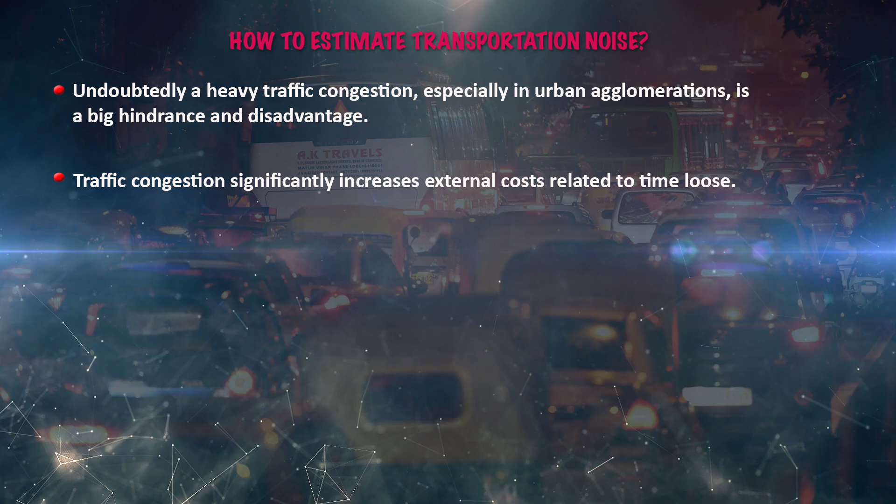So with this previous knowledge, dear learner, today we are going to discuss estimation of transportation noise. How to estimate transportation noise? Undoubtedly heavy traffic congestion, especially in urban cities, is a big hindrance and also a disadvantage. Traffic congestion significantly increases external costs related to time loss. It has a negative impact on health also. Due to the increased travel time, the stress increases and also the arterial pressure increases. So the driver's ability to respond properly definitely decreases, and in consequence there is a safety issue. So these are the factors involved in the transportation sector.

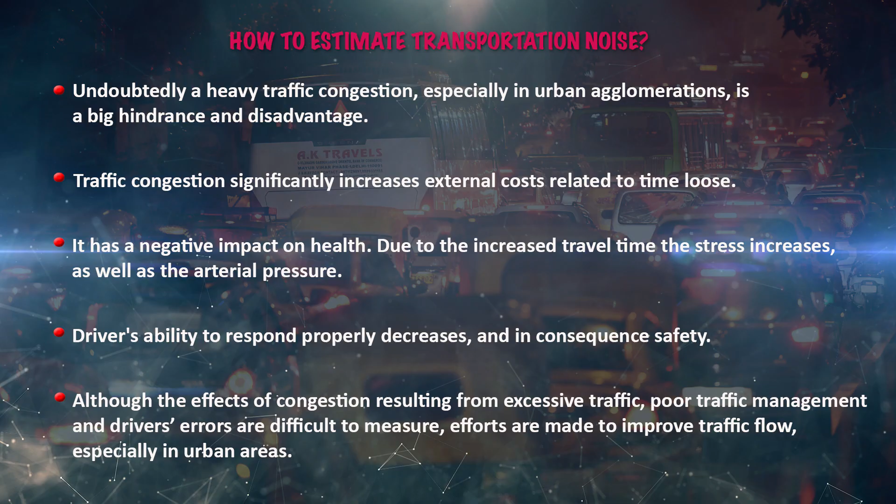So although these effects of congestion resulting from excessive traffic, poor traffic management and sometimes drivers' errors are difficult to measure, many efforts are made to improve traffic flow, especially in urban areas. Congestion is a result of improper traffic management and objective overcapacity. It is also a strong determinant of pollution dispersion and also air pollution levels we have experienced.

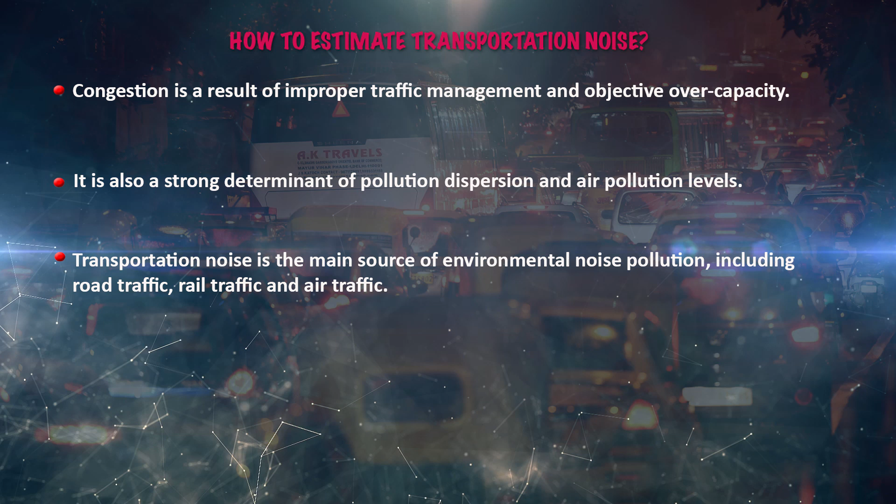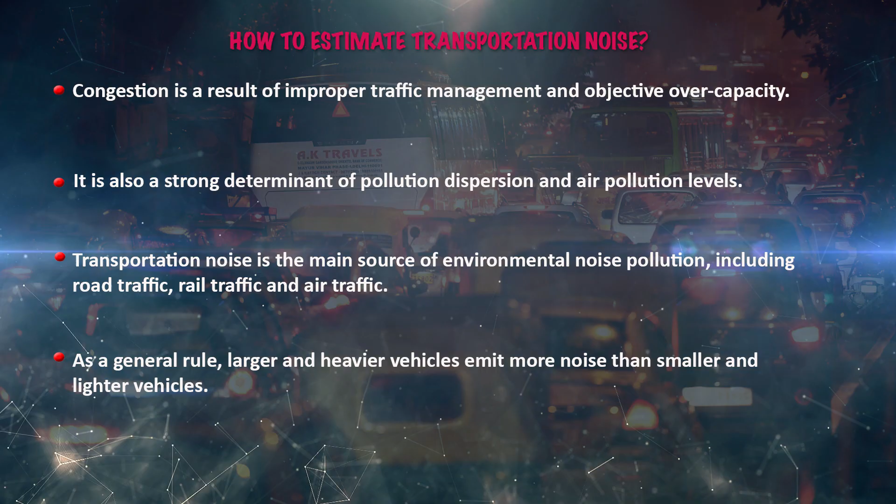So transportation noise is the main source of environmental noise pollution, like road traffic, railway traffic and also air traffic. There is a general rule that larger and heavier vehicles emit more noise than smaller and lighter vehicles. Some exceptions are there, that means helicopters and 2 and 3 wheelers. The noise of road vehicles is mainly generated from the engine and also from frictional contact between the vehicle and the ground and air. So these are some of the elements which can propagate.

And in general, road contact noise exceeds engine noise at speeds higher than 60 km/h. The physical principle responsible for generating noise from the tire road contact is less well understood, that means it is not properly studied. So the sound pressure level from traffic can be predicted from the traffic flow rate, the speed of the vehicles, the proportion of heavy vehicles and the nature of the road surface.

Special problems definitely will arise in areas where the traffic movements involve a change in engine speed and power, like traffic lights, hills and also some intersecting roads. Sometimes it may be topography, meteorological conditions and low background levels which are unfavorable, like mountain areas.

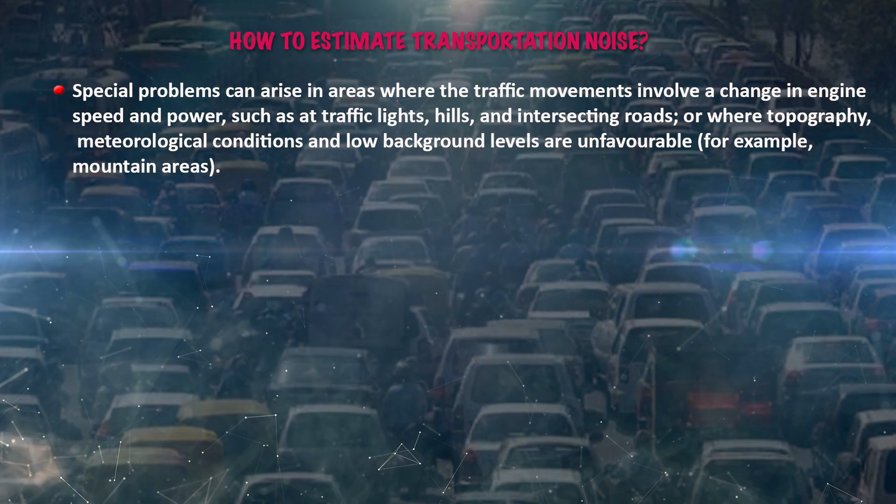And railway noise depends primarily on the speed of the train, but variations are present depending upon the type of engine, type of wagons, the rails and their foundations and also the roughness of wheels and rails. It is very interesting to know that small radius curves in the track, as may occur for urban trains, can lead to very high levels of high frequency sound, known as wheel squeal. Noise can be generated in stations because of running engines, whistles and loudspeakers, and in marshalling yards because of shunting operations.

So the introduction of high speed trains has created special noise problems with sudden but not impulsive rises in noise. At speeds greater than 250 kilometers per hour, the proportion of high frequency sound energy increases and the sound can be perceived as similar to that of overflying jet aircraft. Special problems can arise in areas close to tunnels, in valleys or in areas where the ground conditions help to generate vibrations. The long distance propagation of noise from high speed trains will constitute a problem in the future if environmentally friendly railway systems are expanded.

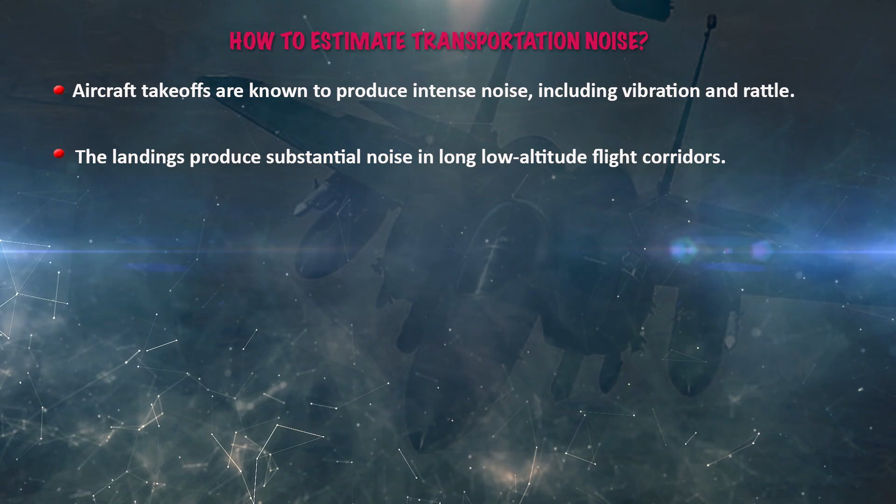Aircraft operations generate substantial noise in the vicinity of both commercial and military airports. Aircraft takeoffs are known to produce intense noise, vibration as well as rattle sound sometimes. The landing procedures also produce substantial noise in long, low altitude flight corridors.

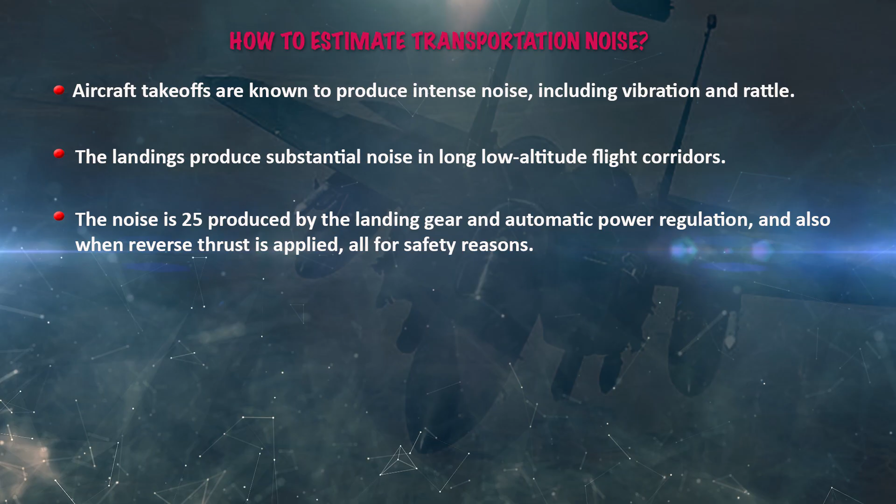So the noise is produced by the landing gear and also automatic power regulation and also when reverse thrust is applied, all for safety reasons only. But in general, larger and heavier aircraft produce more noise than lighter aircraft.

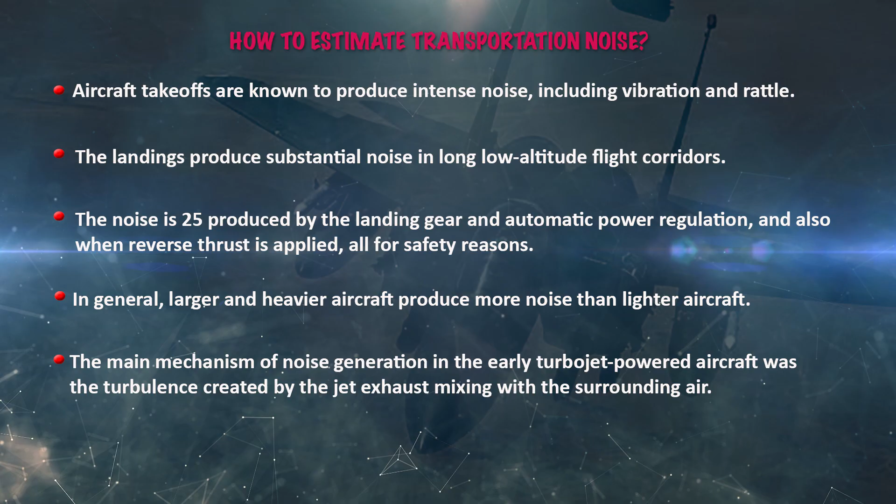So the main mechanism of noise generation in the early turbojet powered aircraft was the turbulence created by the jet exhaust mixing with the surrounding air. This noise source has been significantly reduced in modern high bypass ratio turbofan engines that surround the high velocity jet exhaust with lower velocity airflow generated by the fan.

So the fan itself can be a significant noise source, particularly during landing and taxiing operations. Multi-bladed turboprop engines can produce relatively high levels of tonal noise. The sound pressure level from aircraft is typically predicted from the number of aircraft, the type of airplanes, their flight paths, the proportions of takeoffs and landings, and the atmospheric conditions.

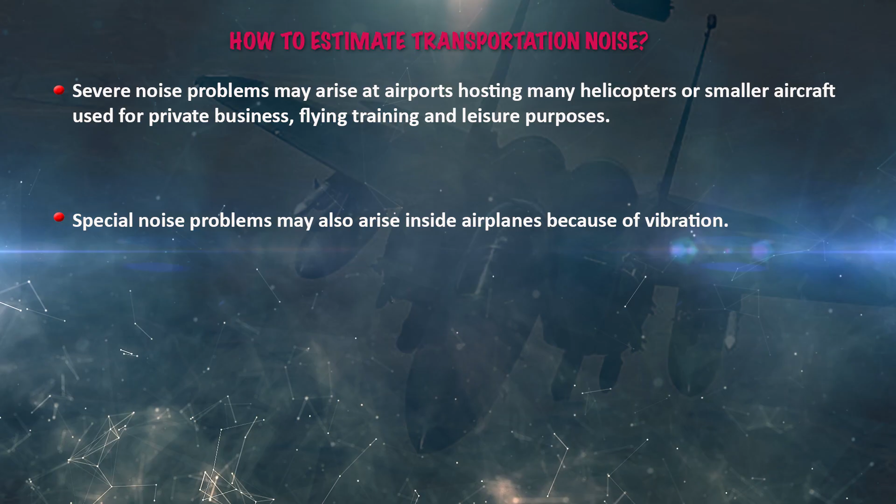Severe noise problems may also arise at airports hosting many helicopters or smaller aircraft used for private business, flying training and sometimes leisure purposes. Special noise problems may also arise inside airplanes because of vibration. The noise emission from future superjets is of course unknown.

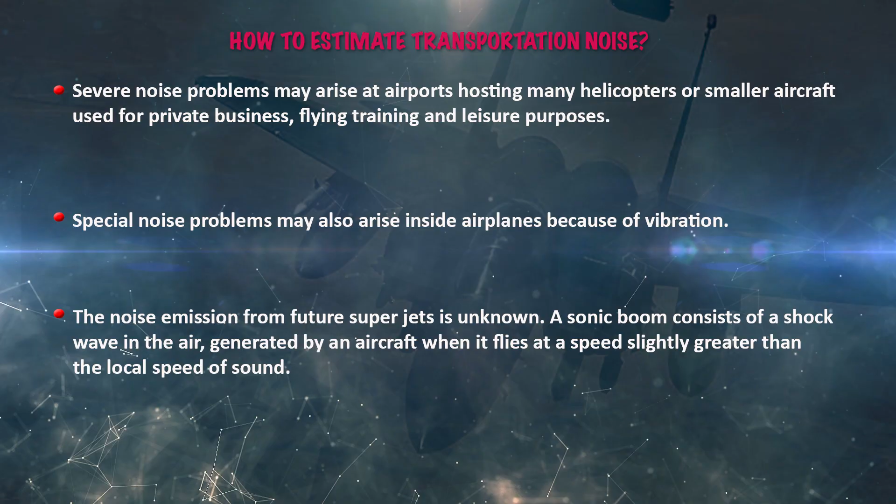A sonic boom consists of a shock wave in the air generated by an aircraft when it flies at a speed slightly greater than the local speed of sound. An aircraft in supersonic flight trails a sonic boom that can be heard up to 50 kilometers on either side of the ground track, depending upon the flight altitude and the size of the aircraft. A sonic boom can be heard as a loud double boom sound. At high intensity it can damage property.

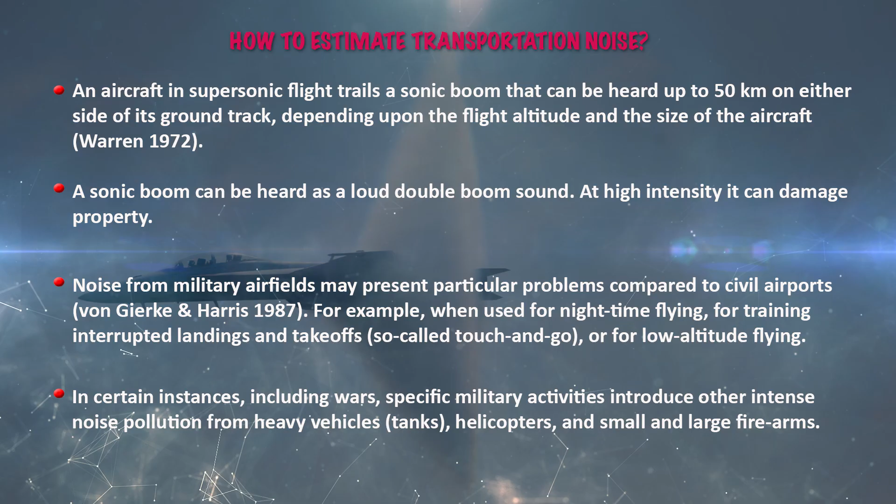Noise from military airfields may present particular problems compared to civil airports, for example when used for nighttime flying, for training interrupted landings and takeoffs, that means touch and go, or for low altitude flying. In certain instances, like wars or specific military activities, there is other intense noise pollution from heavy vehicles like tanks, helicopters, and small and large firearms.

So there are 5 types of transportation noise estimation. The first one is internal combustion engine noise prediction. When the internal combustion engine is working, it generates a lot of noise in the surrounding environment. Noise can disturb people's daily life and even endanger people's health, so it has become a growing concern of society. Long exposure to noise can cause insomnia, cardiovascular diseases, and sometimes death.

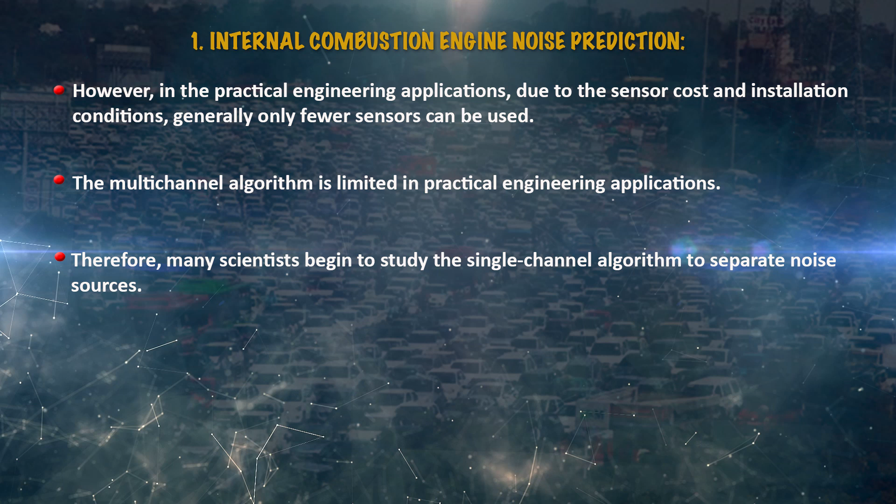The Global Legislative Committee is developing strict regulations to make ships, cars, and other transportation vehicles quieter. However, in practical engineering applications, due to sensor cost and installation conditions, generally only fewer sensors can be used, so the multi-channel algorithm is limited. So many scientists began to study single channel algorithms to separate noise sources.

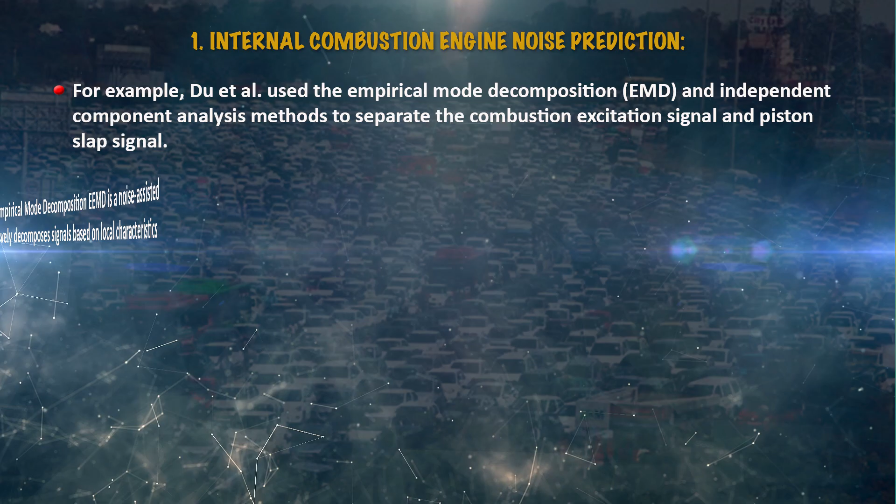For example, Du et al. used empirical mode decomposition, EMD, and independent component analysis methods to separate the combustion excitation signal and the piston slap signal. Another is ensemble empirical mode decomposition, EEMD, a noise assisted data analysis method that adaptively decomposes signals based on their local characteristics.

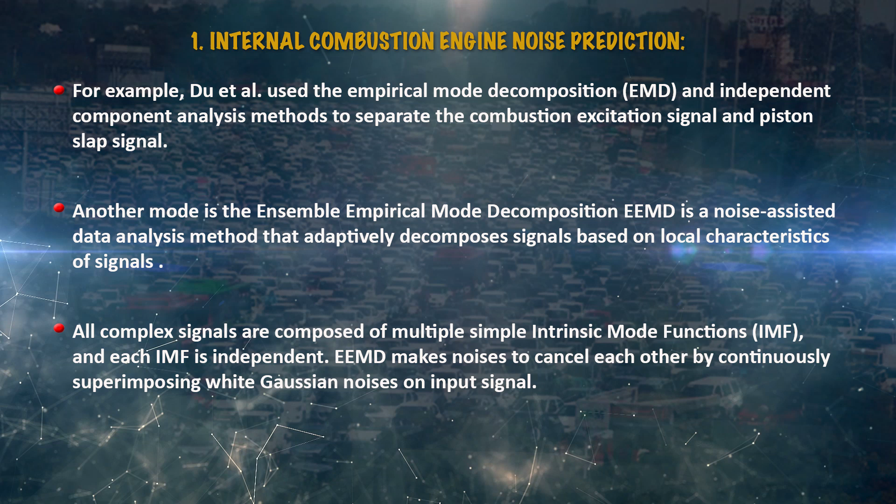All complex signals are composed of multiple intrinsic mode functions, IMFs, and each IMF is independent. EEMD makes noise cancel out by continuously superimposing white Gaussian noise on the input signal. In this way, it can decompose different scales or trend components that really exist in the data time series step by step, generating data sequences with the same characteristic scale, and the added noise is gradually eliminated, so the final denoised result is the signal itself, the only durable and stable part of the EEMD.

The next one is the robust ICA method to separate the combustion noise, piston slap noise and exhaust noise of gasoline engines. Others utilize EEMD, coherent power spectrum analysis and an improved analytic hierarchy process method to identify the noise sources of internal combustion engines. In some cases, EEMD and generalized transform methods are employed to separate combustion noise, piston slap noise as well as gear noise.

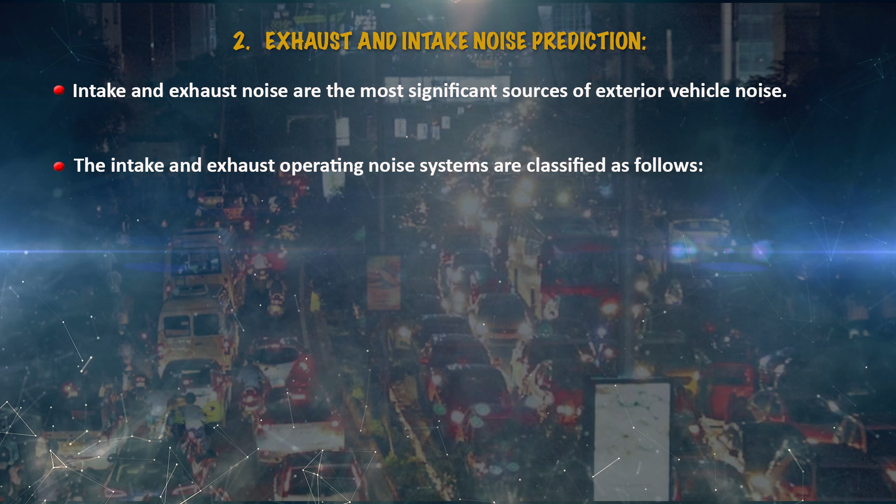The second method is exhaust and intake noise prediction. Intake and exhaust noises are the most significant sources of exterior vehicle noise. They are divided into primary noise sources: pressure fluctuations in the manifolds and their propagation to the exhaust tailpipe or intake orifice, radiated as noise, caused by the unsteady mass flow through the valves.

The system responsible for engine breathing, or primary noise, is suitably harnessed to improve the volumetric efficiency of the engine by wave action tuning. The secondary noise sources are the flow motion through the intake and exhaust systems. This self-induced noise is normally called flow noise.

So the structure radiated sound, that means shell noise from the intake or exhaust tailpipes, which are energized by either primary or secondary noise sources. And aerodynamic noise, that consists of both the classes, that is breathing and the flow noise. And also some other portion is tire, or otherwise we can say road noise prediction.

So the recognition of road noise is considered as one of the major environmental pollutions we have learned. But consequently, it leads to the advancement in accurate noise prediction models that enable us to predict the traffic noise and that recognize common variables like traffic flow, sometimes vehicles per hour, and also traffic speed, and also the composition in terms of fraction of heavy vehicles and road gradient, and also traffic.

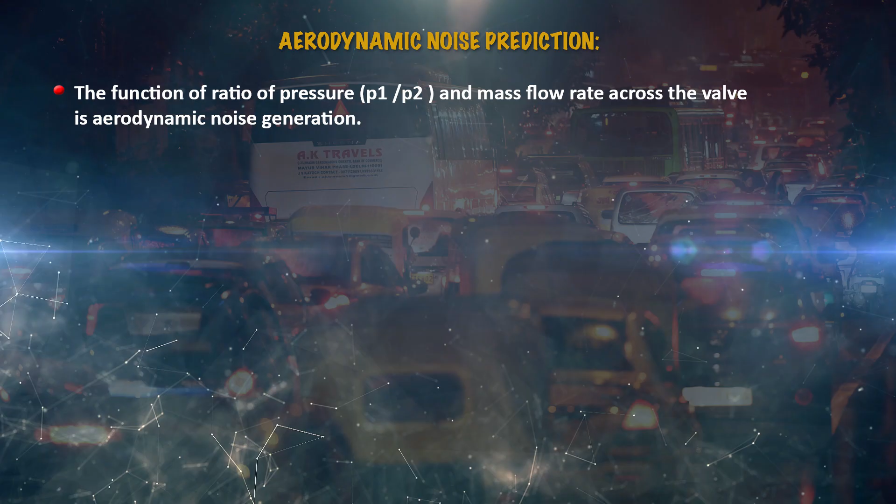And then aerodynamic noise prediction, that means the function of ratio of pressure, P1 upon P2, and also mass flow rate across the valve is the aerodynamic noise generation. So the point at which sonic speed is reached in the valve vena contracta is a function of the valve design and its pressure recovery coefficient, and this is combined with the ratio of upstream to downstream absolute pressure.

So these valves are said to be choked when sonic velocity reaches the vena contracta. By keeping upstream pressure constant, if the ratio of pressure increases, there is no increase in their capacity. Subsonic flows also produce high noise levels, but usually the highest noise level sources are choked valves. So considerable noise starting at pipe velocities of approximately 0.4 to 1.0 sonic is generated by the velocity of the flow in downstream pipes.

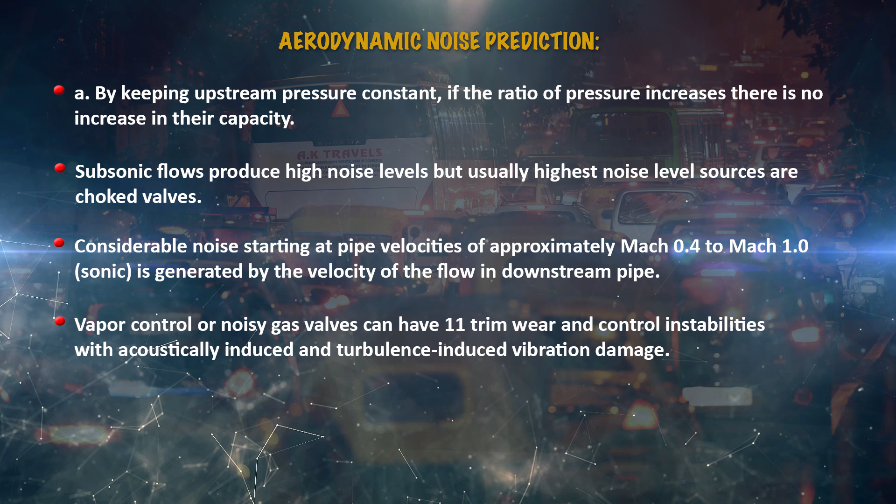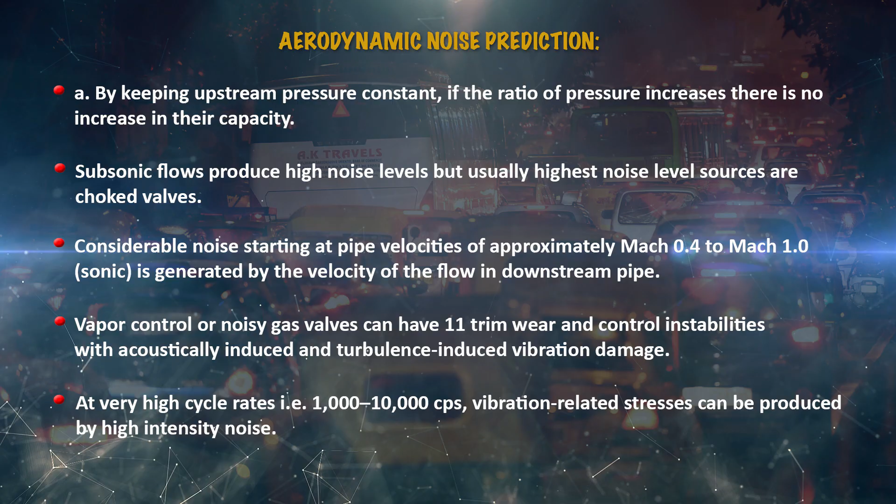So here we have to consider vapor controls also. Vapor control, we can also say noisy gas valves, can have trim wear and control instabilities with acoustically induced and turbulence induced vibration damage. So at very high cycle rates, that is 1000 to 10,000 CPS, vibration related stress can be produced by the high intensity noise. Valve service life can be drastically reduced by the noise induced damage, and in some cases it may be responsible for valve or piping failures quickly, in minutes or hours.

And also we have to see brake noise prediction. Brake noise has been an issue of concern to vehicle manufacturers, because brake noise can be categorized into 4 basic categories. The first one is brake squeal, which has a tonal character, that is components above 1000 hertz, or it can exceed that limit.

And then brake moan, which occurs at moderate speed and is characterized by 100 hertz frequency components. The third one is brake creep groan, which is characterized by frequency components of approximately 100 hertz and occurs at speeds less than walking pace. And the fourth one is brake judder, characterized by frequency components of about 10 hertz, at speeds less than walking pace.

So all four categories of brake noise are because of the pairing of friction surfaces at the rotor disc and the pad. The disc, the pads and the caliper, these three assembly components radiate brake squeal noise. In the case of brake judder, moan and creep groan, the resonant frequencies of the brake components are usually so low, that is less than 1000 to 2000 hertz, so the vehicle suspension acts as a resonating system. So with all these specifications, we have to understand that there are many methods in practice for noise as well as vibration impact.